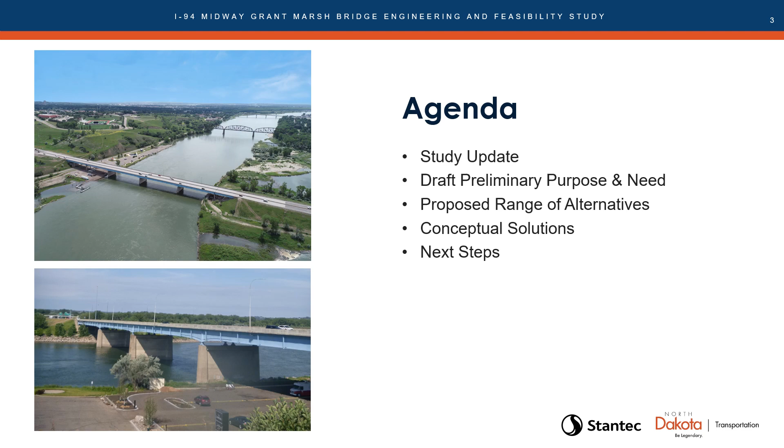In this presentation, we will give an update on the feasibility study, what we've been up to. We'll review the draft preliminary purpose and need, review the range of alternatives under consideration, examine conceptual solutions that will be considered as we move into the alternative stage of the study, and go over what you can expect moving forward. Let's start with the study update.

Since our last public meeting in June, we have completed the items approaching the "We Are Here" line. This includes a survey of the study area, both aerial and within the river. In terms of traffic, we calibrated the existing traffic model and performed an existing and future traffic capacity, operations, and safety analysis. We performed environmental scans and early studies, including wetlands, floodplains, Phase 1A cultural resources, and identification of parklands, Section 4F and 6F resources.

We met with the local stakeholders to help understand study issues and opportunities. We reviewed geotechnical conditions within the study area. We developed the draft purpose and need statement and developed a range of alternatives for consideration. And finally, we are just starting to look at solutions to some of the roadway issues identified through these early studies and conversations.

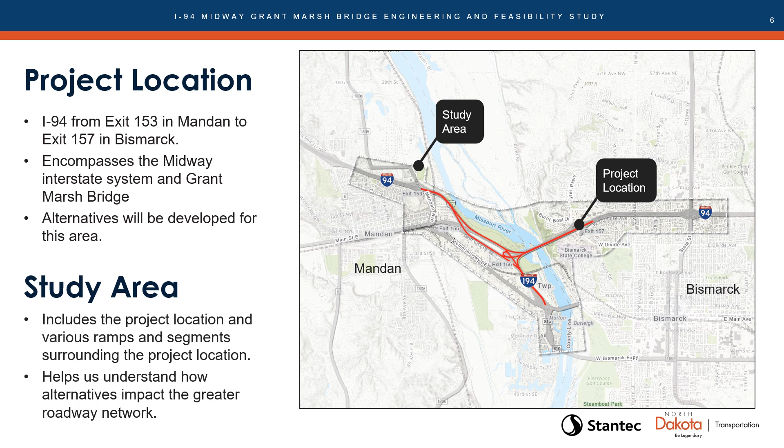Goals of this study include identifying existing conditions, resources, and constraints, establishing a preliminary purpose and need, establishing a range of alternatives, and to develop and determine a reasonable set of roadway and bridge alternatives to carry forward into environmental review under the National Environmental Policy Act, or NEPA.

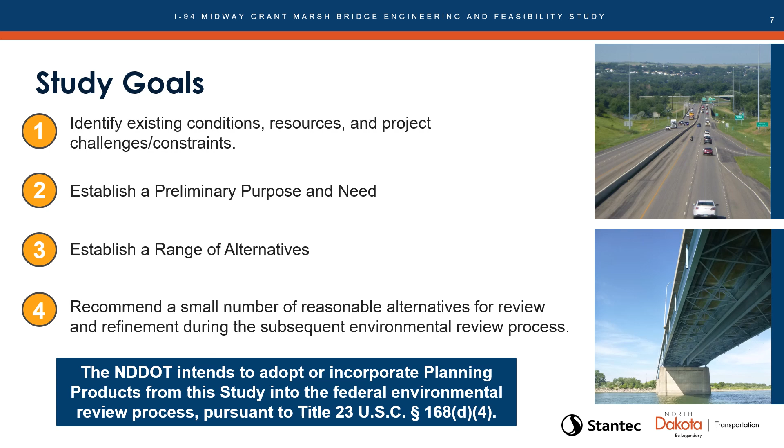In order to develop solutions, we need to be sure that we have clearly identified the problems we are trying to solve, and we know what our desired outcomes are. This is where the project purpose and need comes in. What is purpose and need? And why is it required? The purpose and need provides justification for expending public funds on the project. The purpose and need statement will also be a key factor in determining the range of alternatives and with alternative development and elimination.

We will start with the primary purpose components. These are what drive the project. They provide fundamental goals as to why the project is proposed. It's important to note that any alternative that does not achieve every primary purpose will be eliminated as unreasonable.

We've also identified other desirable outcomes. These are sometimes referred to as secondary purpose and need components. These are additional goals that are desirable but are not the core purpose of the project. These are opportunities for improvement that may be able to be addressed as part of the project if feasible. An other desirable outcome would not by itself provide a basis for eliminating alternatives in the screening stage, but it could be considered as a factor when selecting alternatives to move forward.

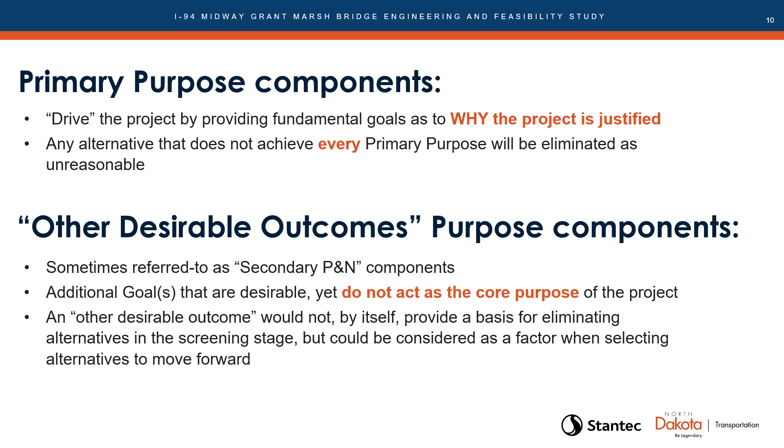The primary purpose for this project consists of 3 goals. Number 1, to provide a long-term interstate highway across the Missouri River, which meets current design standards. Number 2 is to reduce the potential for crashes by providing conforming designs that better meet driver expectations. And number 3, maintain interstate mobility and reliability while extending the congestion-free operating lifespan.

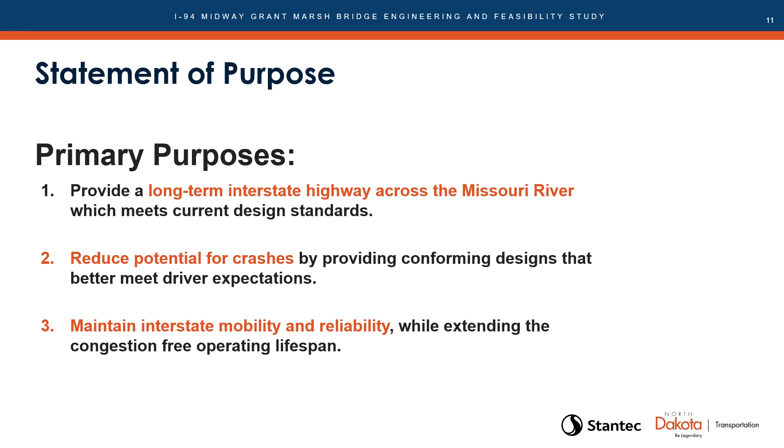We also have 2 other desired outcomes, which include number 1, improve bicycle and pedestrian mobility within the study area by providing new facilities and improving existing facilities. And number 2, seek to minimize impact to the local and regional community by minimizing construction duration and disruption. So essentially, staging the project could inform the build alternatives that are selected to go forward. This project provides an important connection between Bismarck and Mandan, which played into elevating both of these tenets.

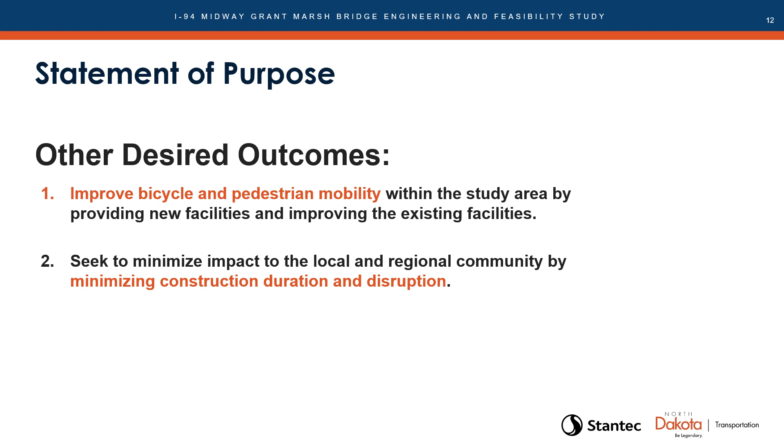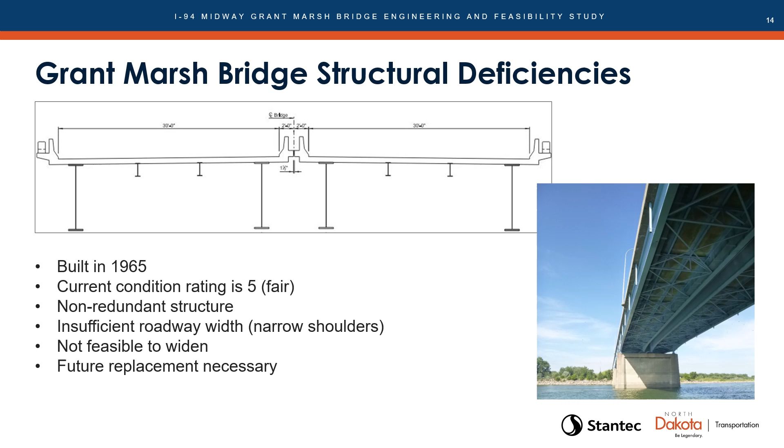The current bridge structure is not feasible to widen. As traffic volumes continue to grow, the bridge will need to be replaced at some point in the relatively near future. The most recent bridge inspection shows condition ratings of fair, which means that all primary components are structurally sound, but repairs and continually ongoing maintenance are required.

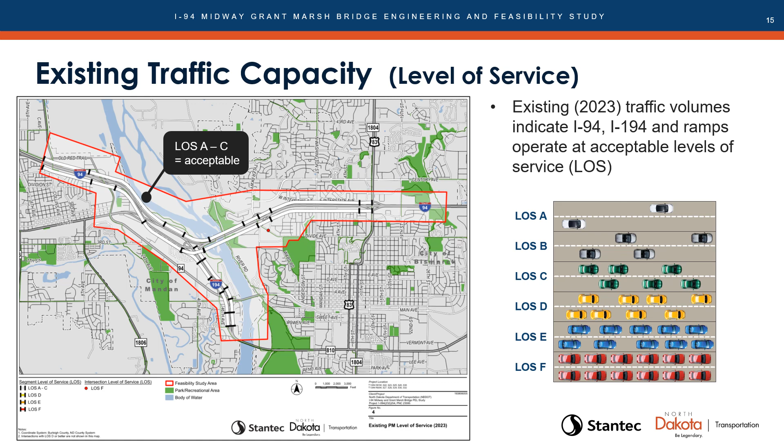This exhibit illustrates that existing I-94 and I-194 freeways and interchanges currently operate at acceptable levels of service, which are LOS A through C. However, since the design year of this project is 2050, we need to project how the study area freeways will operate in the future with increasing traffic volumes.

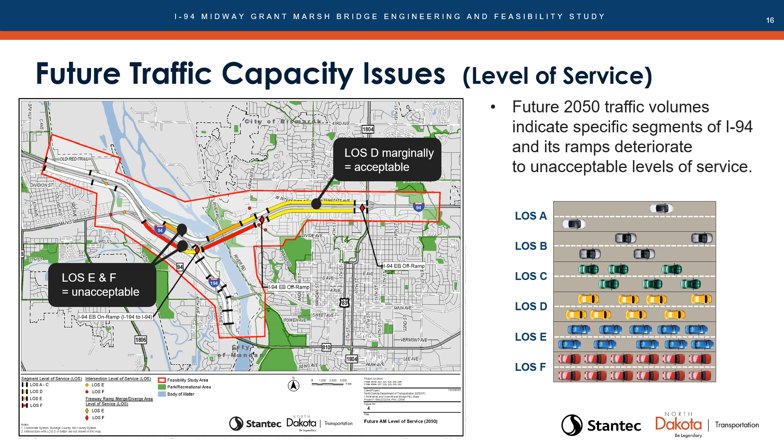This exhibit illustrates that future design year 2050 AM conditions on I-94 would most likely experience unacceptable levels of service, which are level of service E or F in both directions.

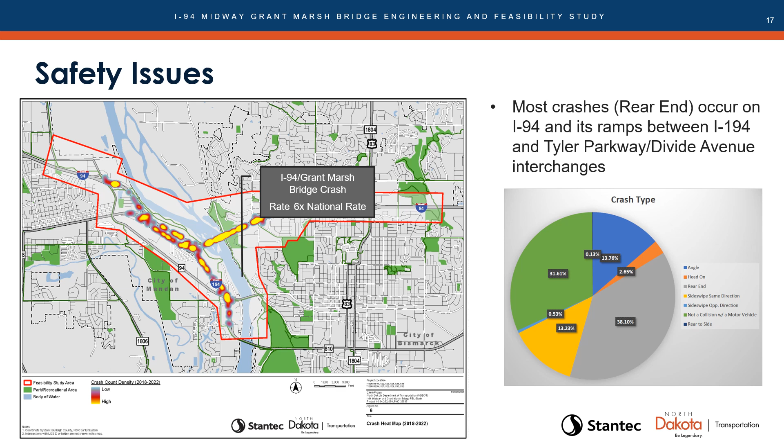With the extensive areas of yellow, orange, and red shaded roadways, this exhibit illustrates the magnitude and locations of the crash problems along the study area freeways and intersections. The freeways and intersections shaded in red have crash histories that are more than double the national rates. This study will investigate various mitigation strategies to bring these rates closer to national averages.

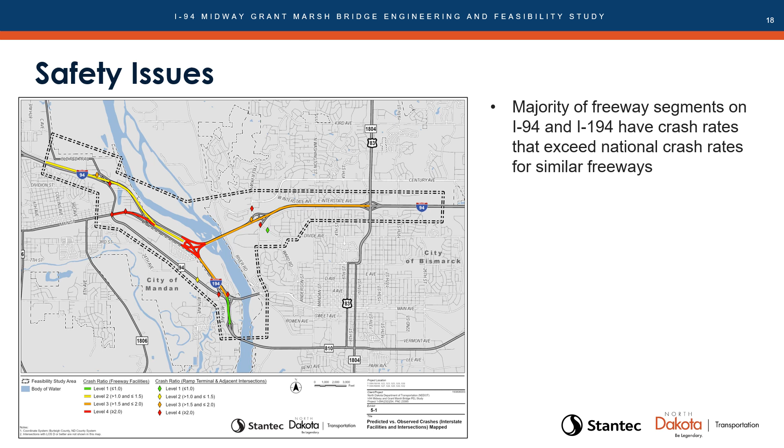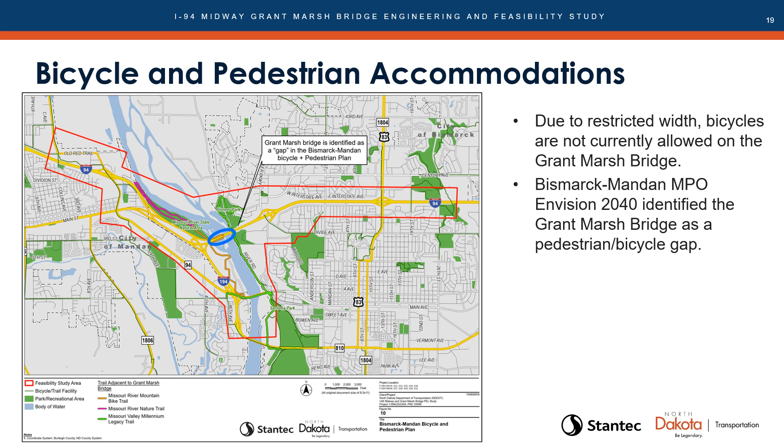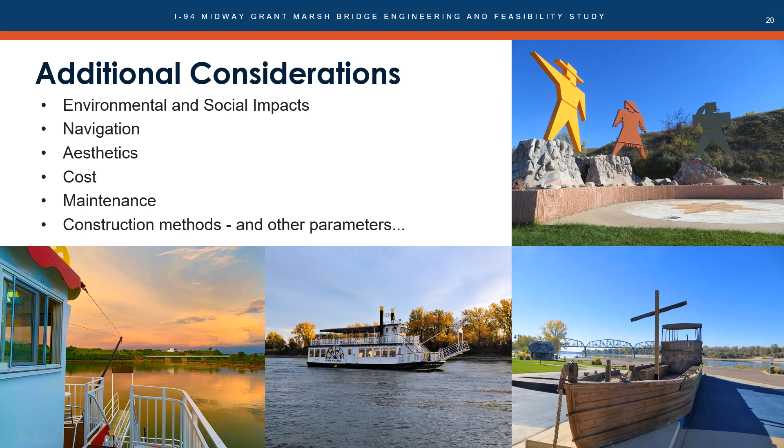Along with the purpose and need tenets, the project alternatives will be developed and reviewed considering other engineering, environmental, social, and economic factors. For example, suitable highway grades or geometric constraints, excessive magnitude of cost, excessive maintenance needs, navigation challenges, aesthetic considerations, Section 4(f) and Section 6(f) viability, and other parameters will be considered.

The alternative screening process involves reviewing a broad range of alternatives and selecting a more limited number to be carried forward for detailed study in environmental review or NEPA. Looking at this broad range of alternatives starts at a high level, then gets into a progressively more detailed and rigorous screening process. But at the end of the day, any of the alternatives will need to meet the primary purpose and need to continue.

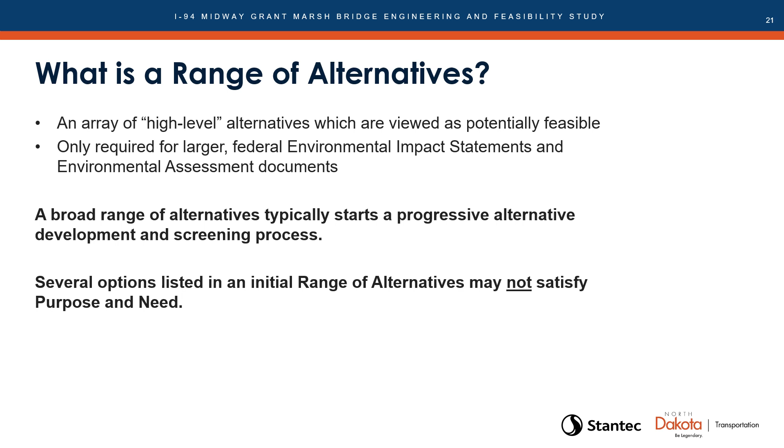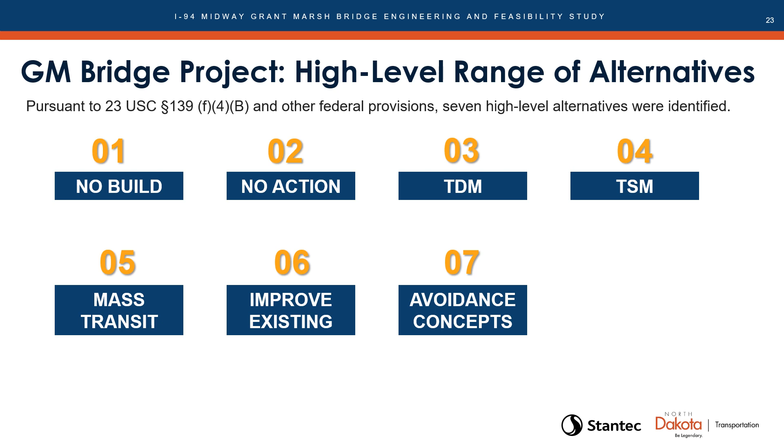We have mentioned the range of alternatives a few times, but what does that mean? This is a list of potential project implementation options for consideration as the range of alternatives. We have a total of 7 alternative categories that we will investigate. The first option is the no-build alternative. This alternative serves as the baseline to which the other alternatives are compared. It evaluates the outcome if the proposed action is not taken, with allowances for routine maintenance, safety improvements, or other currently planned transportation improvements not related to this study.

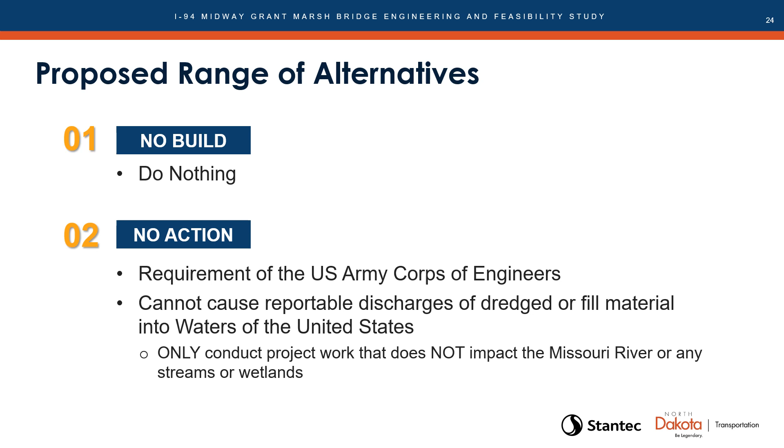The second option is the no action alternative. This refers to an alternative developed for which the U.S. Army Corps of Engineers needs to take no action with a federal permit under the Clean Water Act. As the study area includes a crossing of the Missouri River, we will need to determine if a feasible alternative exists that does not require a permit.

TDM, Transportation Demand Management, refers to a broad scope of strategies to provide travelers with realistic and accessible alternatives to their existing travel modes and patterns with an objective of reducing traffic volume. They are traditionally applied in metropolitan settings and may include telecommuting, workplace flex time, compressed work week, carpool and vanpool incentives, improving bicycle and pedestrian facilities, including e-bike users, implementing or increasing parking fees, peak period surcharges on parking, tolls, transit, and congestion pricing, which is variable tolls based on traffic levels.

TSM, Transportation System Management, is a comprehensive toolbox of solutions which use data and intelligence systems to plan, optimize, and manage various aspects of transportation operations. TSM generally consists of small-scale operational improvements to intersections, signal timing, dynamic message signage, and access management to promote urban area traffic movement more efficiently during daily peak travel periods.

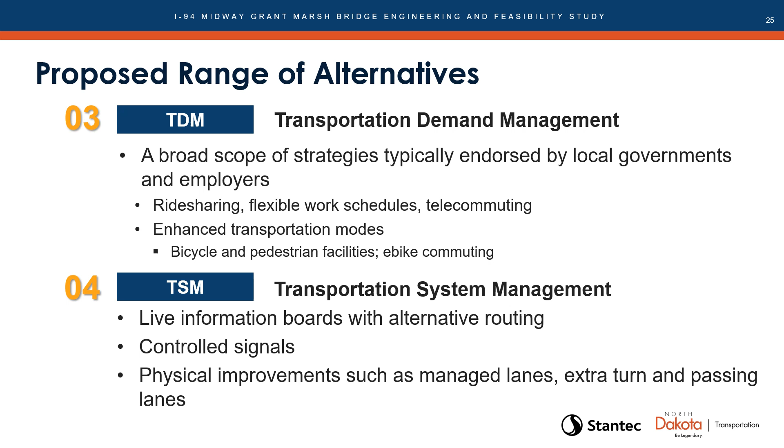Mass transit. The mass transit system's options, when highly utilized, could offer advantages by providing higher capacity than single occupancy vehicles. These systems move a large number of people more efficiently, offering a more environmentally friendly transportation option, especially when operated at peak capacity.

Bis-Man Transit's current network of existing fixed bus routes operate within Bismarck and Mandan. Fixed routes operate through a predetermined route but do not have specific stations. The Bismarck-Mandan fixed route operates under a flag down the bus system, meaning that a bus can pick up and drop off people at any location within the fixed route that does not lie within a no-stop zone.

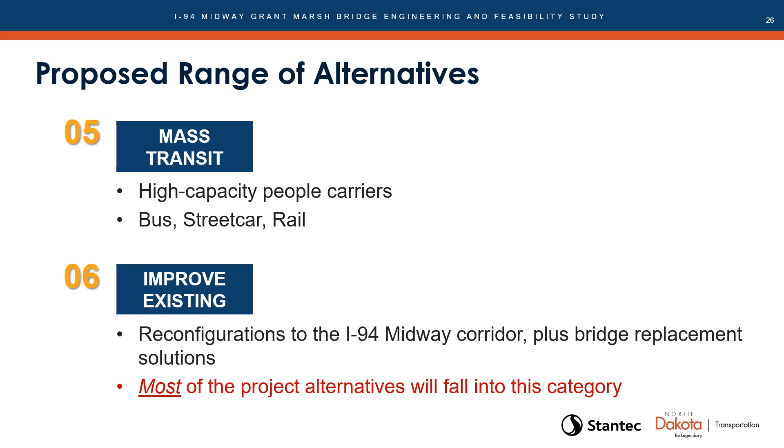Improve existing. This option consists of corridor-specific concepts designed to meet the various deficiencies and needs as outlined in the draft purpose and need. Improvements would consider solutions such as reconstructing portions of the existing I-94 Midway system, replacement of the existing Grant Marsh Bridge, and considering a collector-distributor roadway that provides additional lanes along the freeway through lanes to facilitate access with local roadways. Most of the project alternatives will fall into this category.

Avoidance concepts. This option involves minimizing impacts to recreational parks, historic cultural tribal resources, trails, and other features that line the Missouri riverbanks in the project area. Several of these attractions enjoy the protection of federal laws and regulations, including transportation laws such as Section 4(f) under the USDOT or Section 6(f) regulated under the Land and Water Conservation Act. As with the no action alternative required as part of the U.S. Army Corps of Engineers permit process, any impacts to 4(f) or 6(f) properties will need to consider avoidance alternatives.

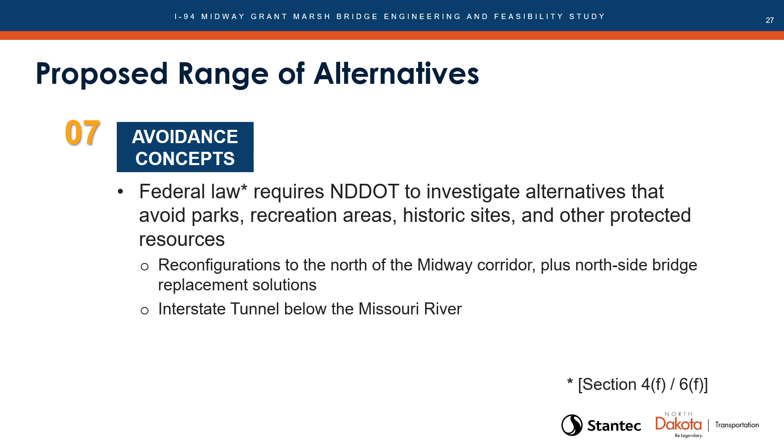This could include a crossing of the Missouri River north of the existing route. This could avoid sensitive properties and potentially provide a more direct interstate route, but would also likely result in a longer route for local residents and may require multiple river crossings. Replacing the Grant Marsh Bridge with a tunnel below the river would also avoid the parks along the river, but comparatively higher construction and maintenance costs would be a consideration.

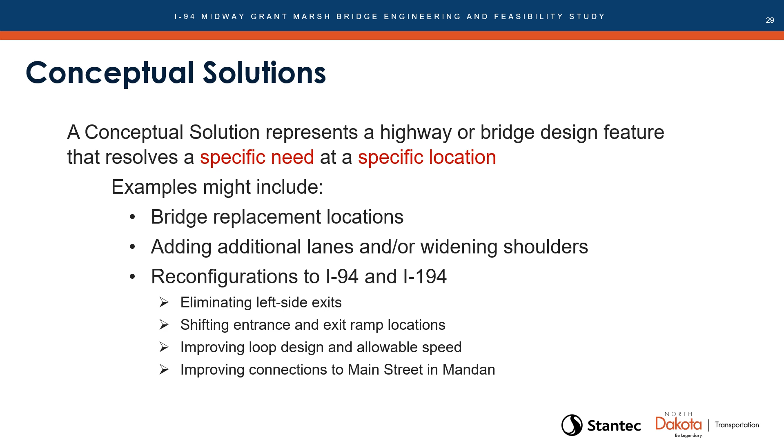Next, we're going to talk about conceptual solutions. Based on earlier studies and prior feedback, the project team developed a variety of conceptual solutions. A conceptual solution represents a highway or bridge design feature that resolves a specific need at a specific location. Examples might include bridge replacement locations, adding additional lanes or widening shoulders, reconfiguring I-94 or I-194 by eliminating left side exits, shifting ramp locations, improving loop ramp design and allowable speed, or improving connections at Main Street in Mandan.

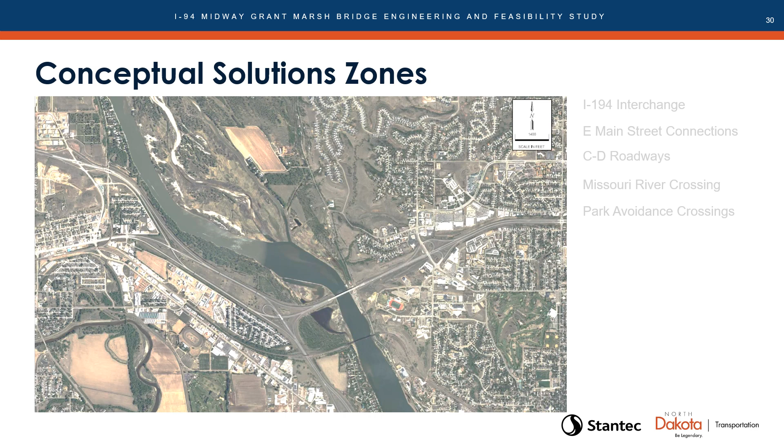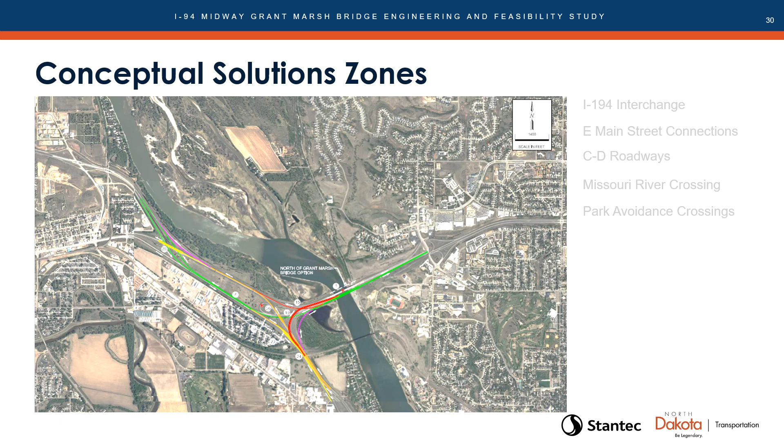We're going to take a look at 5 conceptual solution zones. The 5 areas are the I-194 interchange, East Main Street, CD roads, the Missouri River crossing, and park avoidance crossings. When the solutions of each zone are combined, they will form an alternative. By choosing various solutions in each zone, different alternatives can be developed. Today, rather than jumping in to develop alternatives, we want to take the time to introduce conceptual solutions within each of the zones that will look to address existing issues present in the corridor. In each zone, we'll review the issues followed by possible solutions.

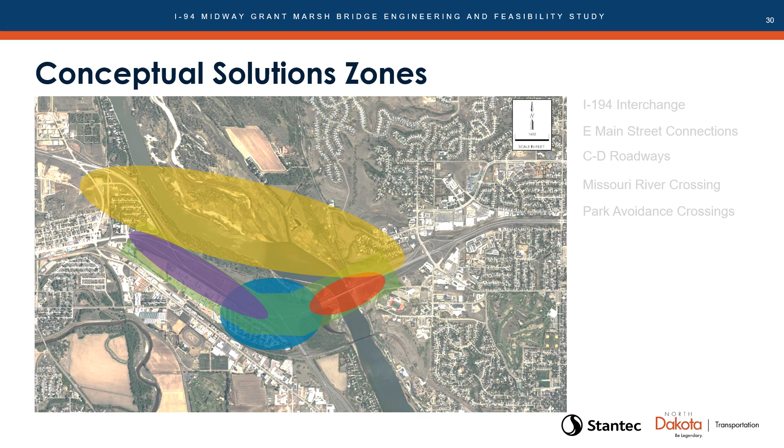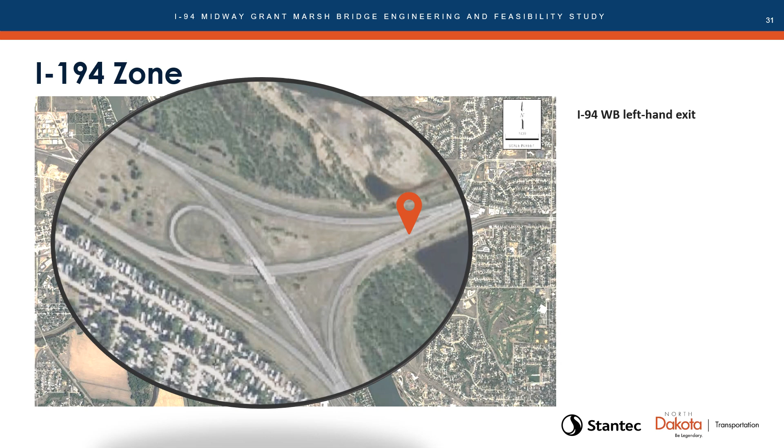The first zone we're going to look at is the I-194 interchange. The issues present at the interchange consist of the I-94 westbound left-hand exit, which violates unfamiliar drivers' expectations, since most freeway ramps enter and exit on the right side of the freeway in North Dakota. The combination of this left exit and the Tyler Parkway right-hand entrance creates a two-sided weave that requires additional weaving movements. The second issue is a small radius loop ramp, which forces drivers to decelerate to 25 miles per hour to navigate. This is much slower than the typical 50-mile-an-hour ramp and contributes to rollover and run off the road crashes.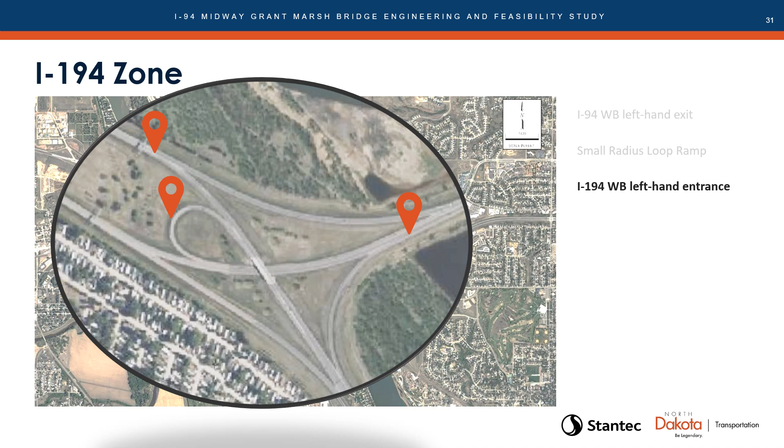The next issue is the I-194 westbound left-hand entrance to I-94 westbound. Similar to left exits, this creates disruptions in mainline with faster traffic in the passing lane converging with slower entering traffic. This type of merge is more difficult to navigate since the driver is identifying gaps in mainline traffic on the passenger side of the vehicle. The last issue is the I-194 eastbound two-sided weave between I-94 and Memorial Highway. Traffic from I-94 westbound merges on the left side with I-94 eastbound traffic heading south on I-194 to either Memorial Highway or I-194. This configuration creates a two-sided weave that requires additional weaving movements.

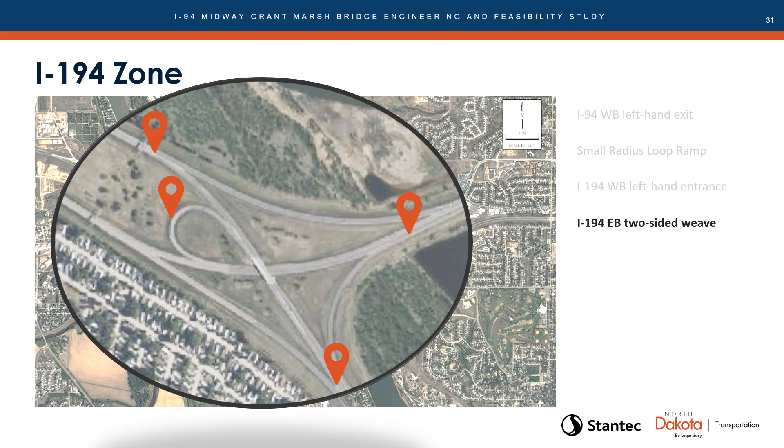Another possible solution would be to provide a dual I-94 westbound flyover. The flyover would service both exits for I-194 eastbound and East Main Street.

Now looking at the I-194 eastbound two-sided weave. With an I-94 westbound flyover, Memorial Highway and I-194 connections could be grade separated. The flyover ramp from I-94 westbound to Memorial Highway and I-194 eastbound would drop in between the two ramps from I-94 eastbound, heading to Memorial Highway and I-194 eastbound.

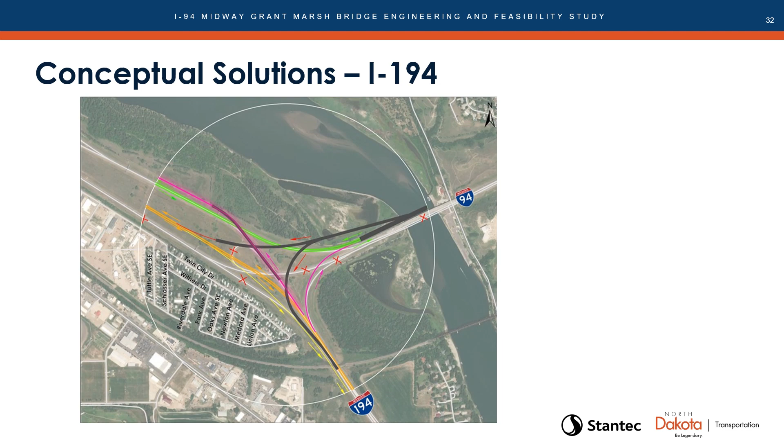Now we'll take a look at the East Main Street zone. The issues present at this location consist of the I-94 westbound left-hand exit to East Main Street, which also violates unfamiliar drivers' expectations. The combination of this left exit and the I-194 left-hand entrance creates a one-sided weave alongside I-94 westbound. The combination of the right-hand entrance from East Main Street and the right exit ramp from I-194 creates a one-sided weave alongside I-94 eastbound.

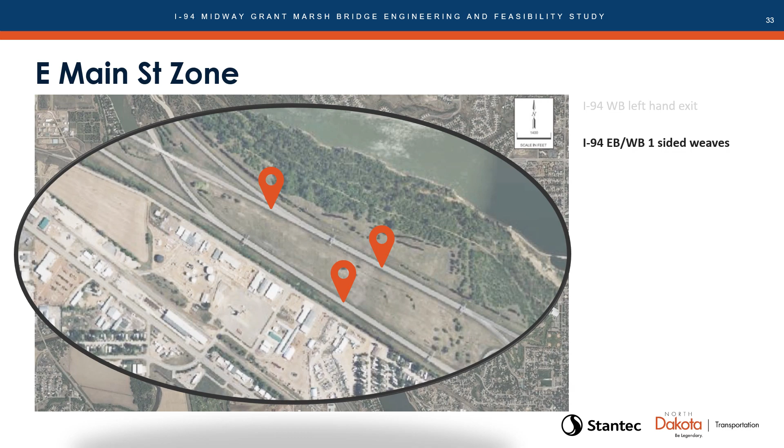With this concept, the I-94 westbound is located with the I-94 eastbound in the existing interstate median. The I-94 westbound exit can occur on the right side. This eliminates the I-94 westbound weave and left-hand entrance-exit by grade separating the movements and shifting the traffic to the CD roads. The I-94 westbound exiting traffic combines with the I-194 westbound traffic on the CD roadway, where the merging can occur rather than on mainline.

Looking at East Main Street, eastbound traffic to I-94 and 194 split to two separate ramps after the last traffic signal at Twin City Drive. East Main Street traffic to I-194 eastbound separates from traffic to I-94 eastbound and will merge with the I-94 eastbound ramp to I-194 eastbound. The separation of movements eliminates the I-94 eastbound weave.

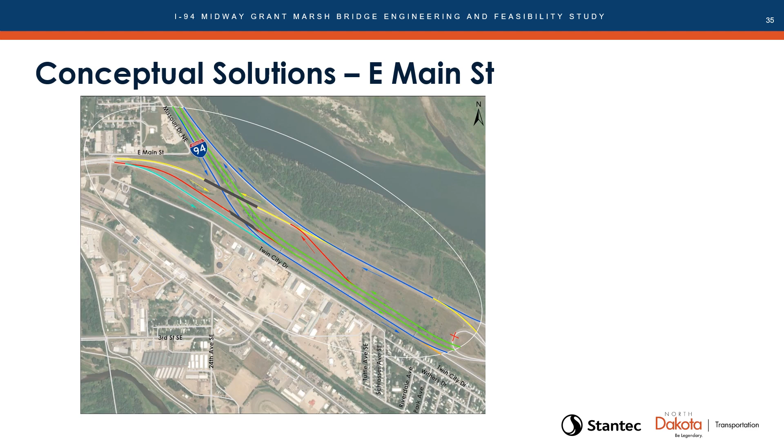The next zone we're going to take a look at is the collector distributor roadway, also referred to as CD roads. CD roads run adjacent to mainline freeways and are separated by flush or barrier medians. CD roads are designed to eliminate weaving from mainline freeways by locating the weaving, merging, diverging movements to the less congested CD facility, which improves safety.

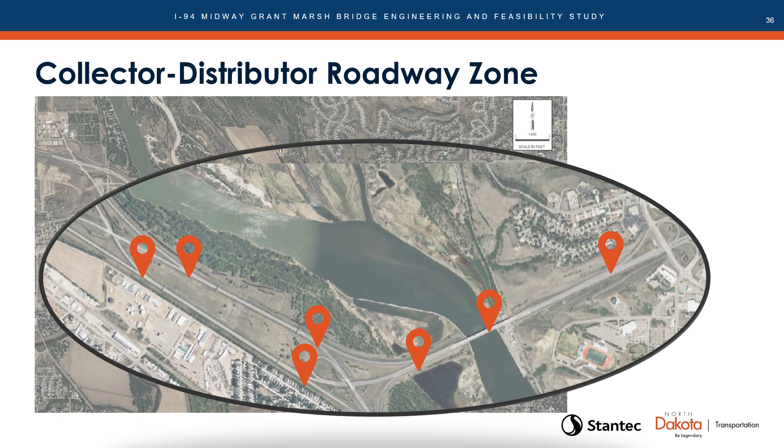The CD roads provide access to mainline freeway, but reduce exit and entrance points to decrease disruption in the mainline freeway. Each access point on I-94 creates disruption to the flow of mainline I-94. The flags on this exhibit identify the existing I-94 access points within the study corridor. As CD roads are not common to North Dakota, the next few slides will go into further detail on CD roads. This is an example of a simple collector distributor roadway.

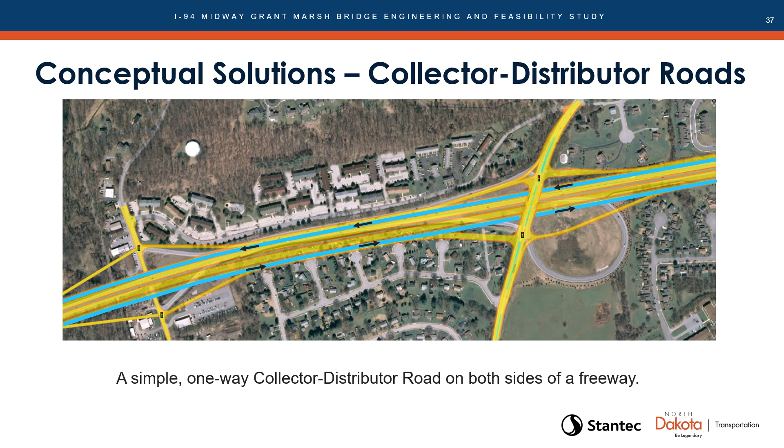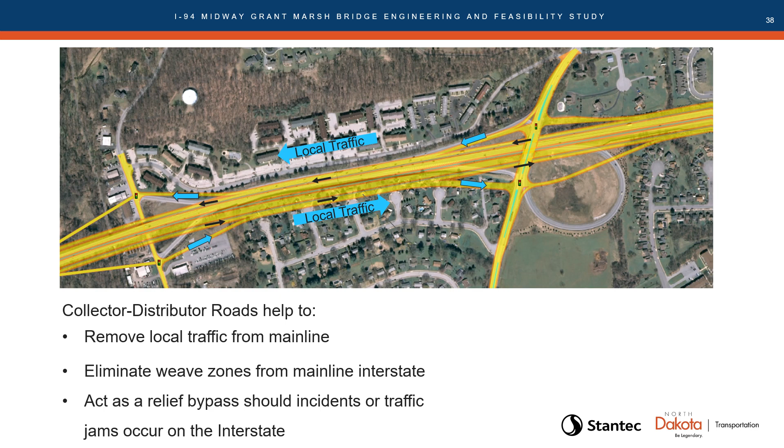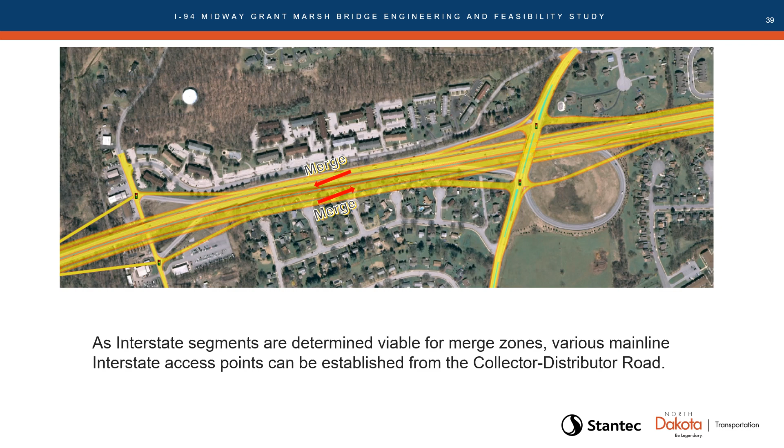They would eliminate weave zones from mainline interstate and would also act as a relief bypass should incidents occur on the interstate. As interstate segments are determined viable for merge zones, various mainline interstate access points can be established from the collector distributor roadway.

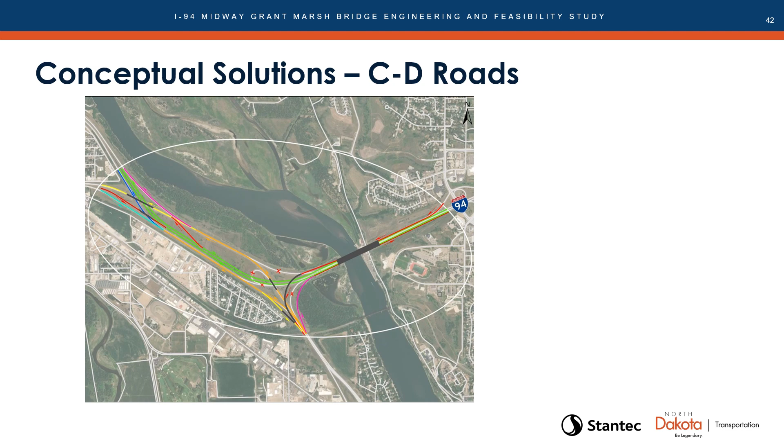Now we'll take a look at the Missouri River crossing zone. First issue present at this location is the crossing. Where should the crossing be located? Second, I-94 westbound two-sided weave. Talked about this earlier with the right-handed entrance from Tyler Parkway and the left-sided exit to I-194. The third issue being I-94 eastbound merge near the bridge.

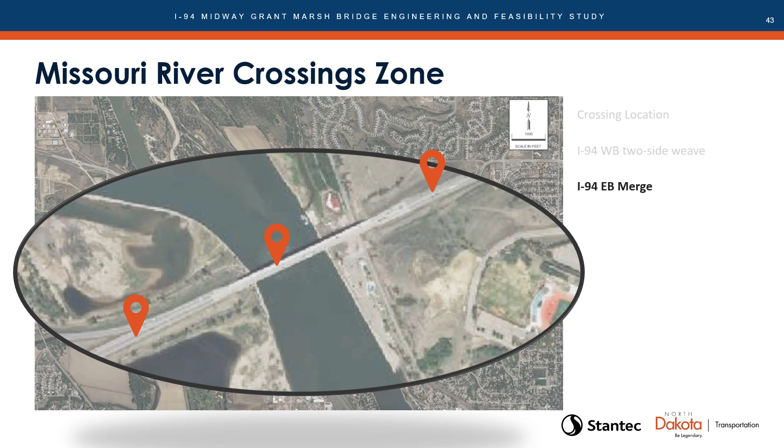Another possible solution is a CD road option, which would construct 3 bridges over the Missouri River with an I-94 westbound flyover added to the westbound CD bridge. In the eastbound direction, adding the I-194 connection to the CD route would eliminate the merge disruption on eastbound mainline.

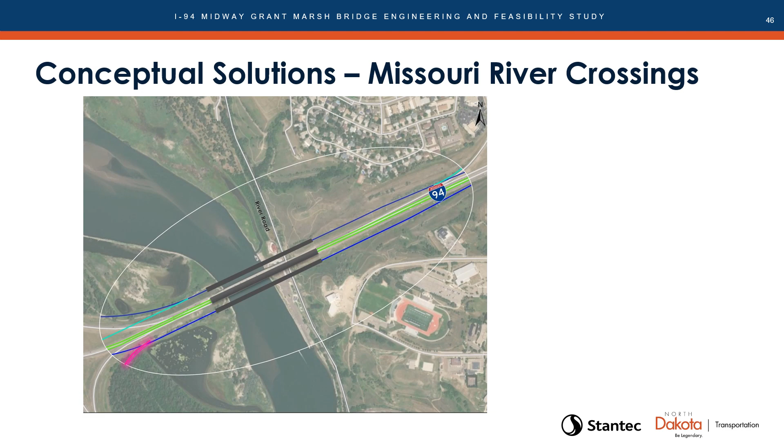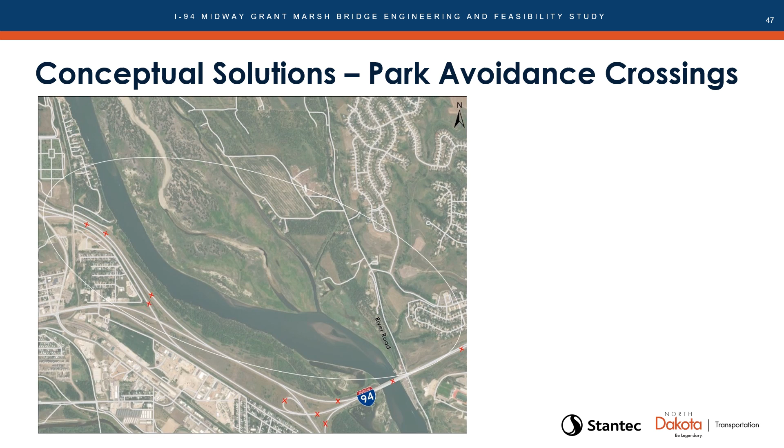Our last conceptual solution zone is the park avoidance crossings. With the previous Missouri River crossing zone, there would be impacts to parks that are located on either side of the existing bridge. Federal guidelines require us to look at solutions which would avoid impacting these special properties. To avoid the park impacts, the I-94 corridor would need to be relocated further north.

Or another concept would be to tunnel underneath the Missouri River. While these conceptual ideas would avoid the special properties, the concepts would be extremely impactful to other properties in the area and carry a hefty price tag.

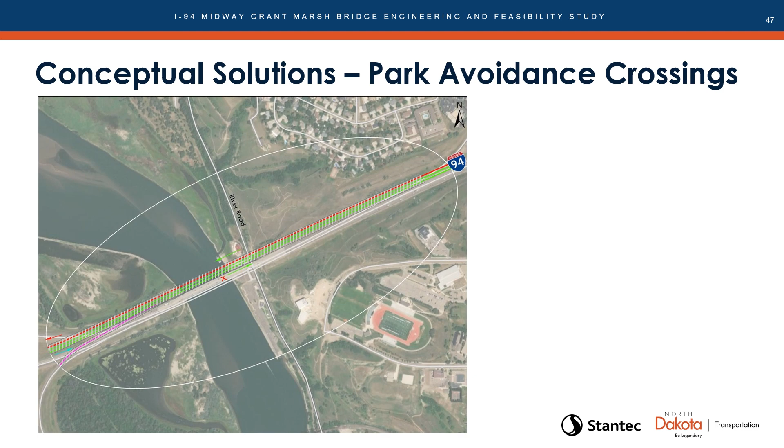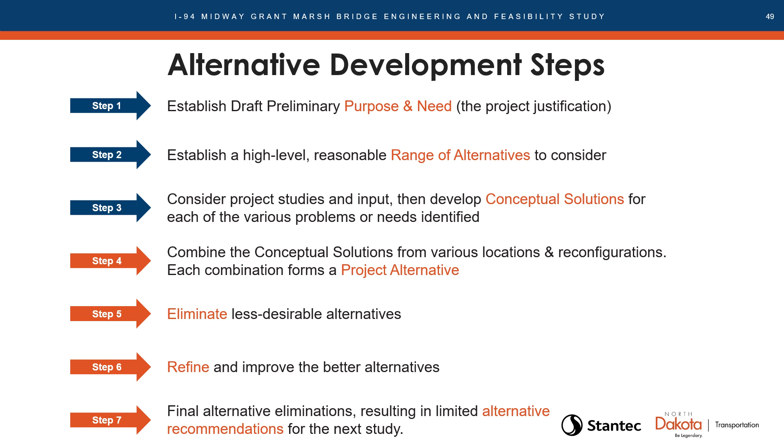The purpose and need will be used to compare and assess the range of alternatives and to develop a set of alternatives. These alternatives will be built from the conceptual solutions reviewed earlier in the presentation. The project alternatives will be evaluated and screened based on both benefits and impacts. Through this process, the NDDOT will reduce and refine a recommended set of around 3 alternatives within the feasibility study to move forward into programming, funding, and NEPA.

Following this public input meeting, we will keep the comment period open until December 22nd. We will then shift into alternative development through next summer and wrap up the feasibility study in late 2024. The study will be published and advertised for review by the public, local government, agencies, tribes, and pertinent stakeholders.